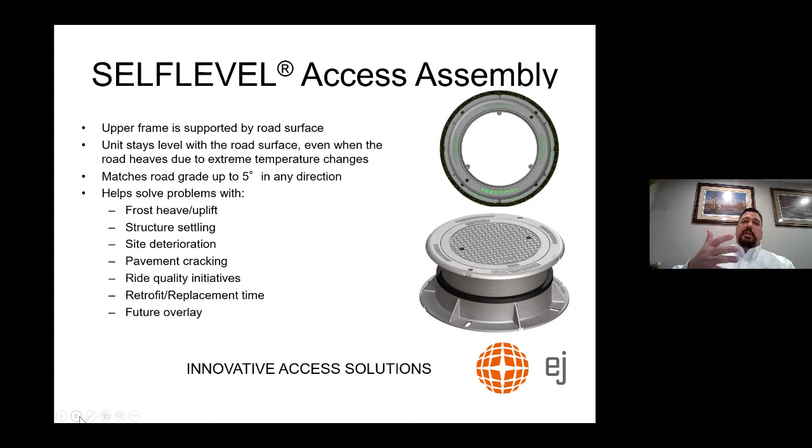Your pavement isn't going to last forever, and this isn't going to make it last forever. But if you can get another 6 to 8 years out of your asphalt life without having to come in and do any remediation or repair work, and your constituents have driven over this multiple times and never had an issue with ride quality, then by all means it's worth it.

I know there's some popular questions that come up when we first take a look at this. At the end, I'll be happy to answer those questions. So I'm going to move along with this video, and I hope that everyone can see it. Apologies, the narrator's not all that exciting, but I won't talk through this so everyone can get the information included.

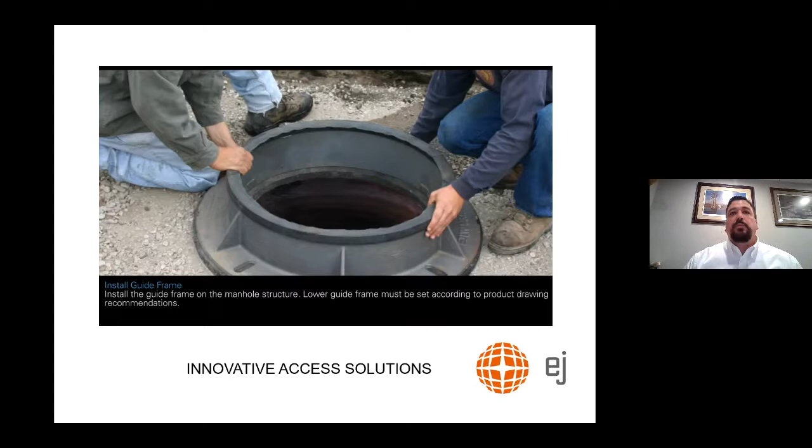Install the guide frame on the manhole structure. The lower guide frame must be set 10 to 14 inches below finished grade. Backfill the guide frame with standard road base material per your local specifications. Install the upper frame, compact backfill and/or base leveling lifts as specified. Pave over the upper frame.

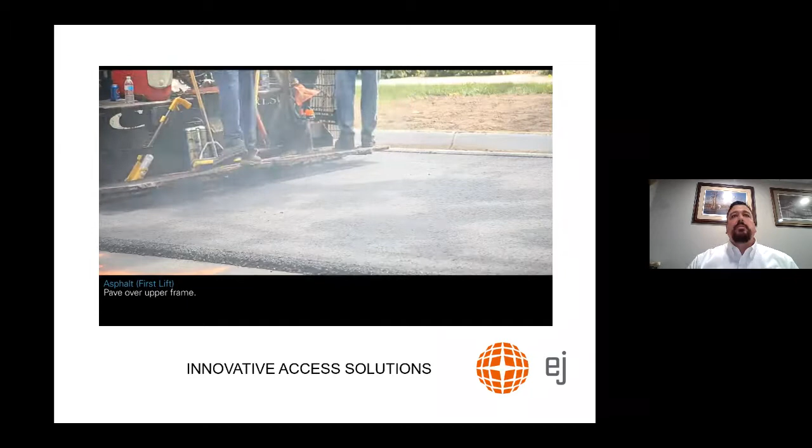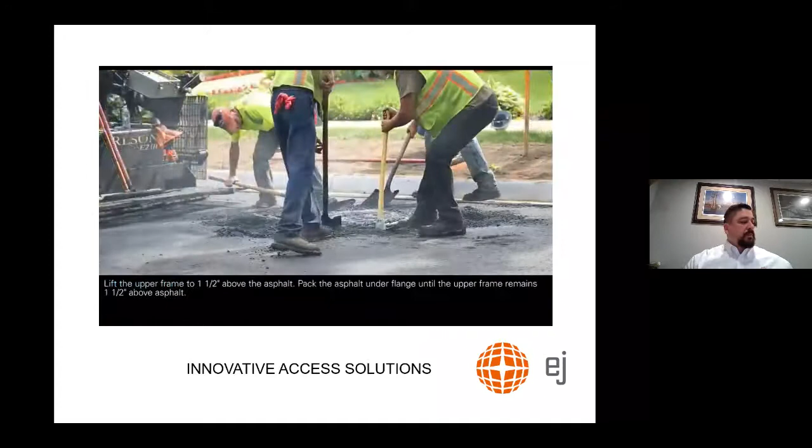Remove the asphalt from the upper frame. Lift the upper frame to 1.5 inches above the asphalt. Pack the asphalt under the flange until the upper frame remains 1.5 inches above the asphalt. Clean the cover as needed. When compacting, start with the outside perimeter, working the asphalt to the center.

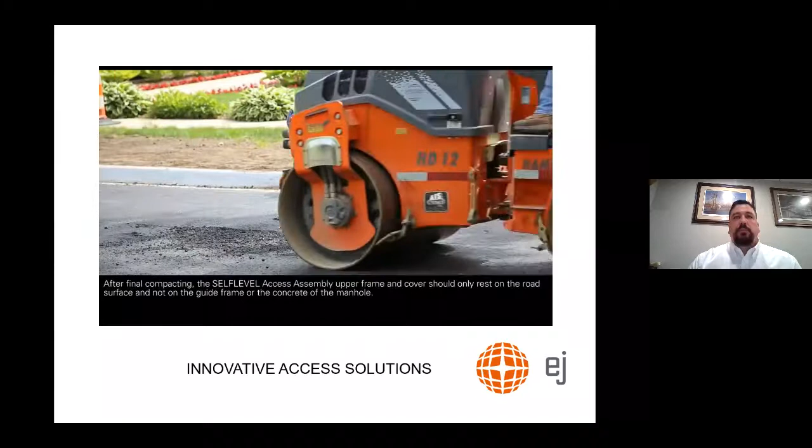So you've watched the video. There's multiple ways of what I call protecting a casting in a roadway. I'm not saying the other ways are good, better, or worse. I'm just providing an alternate method to get the desired finish. This gets completed with the paving process, and there's no delays in opening your roadway.

If you have an application with a pretty heavy profile between your base, leveling, and wearing courses, you can come back and remove the pavement, have the structure plated, remove the pavement again, set it in the same lifts you'd want with compaction, then roll it, or you can do it as part of this paving process.

There's no additional crack sealing required because there's no dissimilar materials. Adjustments later on are very simple and easy. If you're doing an overlay, it doesn't have to be manually broken out of the asphalt, but it can be reused for overlays and mills and fills. So there are no challenges with down-the-road improvements to the roadway.

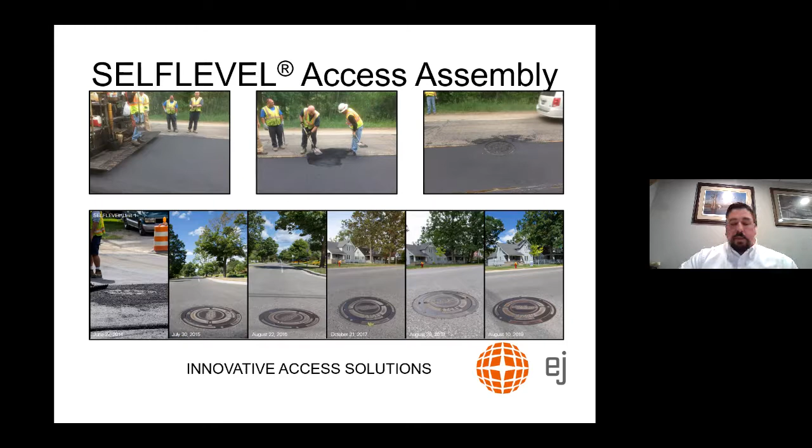So we took the idea of this asphalt self-level and we went ahead and applied it to the valve box. Now, I know that valve boxes are generally a local jurisdictional requirement, whether the municipality or whoever it might be, that they'll mandate what valve boxes get used, but they're still in DOT roadways, county, local roadways. I don't know what it is about valve boxes, but they're either buried or they've heaved up and broken off.

We took a great concept with this asphalt self-level for the full size and incorporated it into our valve box tops. As you can see, the very top of that is very robust and will handle traffic back and forth just like the other one. It doesn't sit up proud, it does sit flush, and that rolled edge is designed to accept that asphalt. So that is the same concept, a very similar installation.

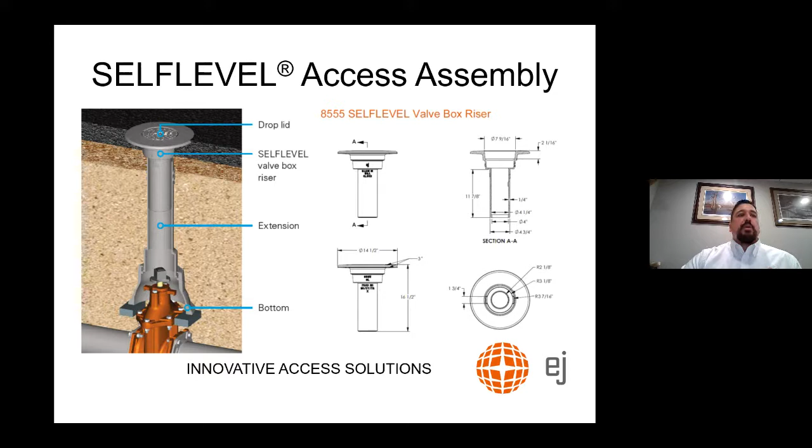Now, not all roadways are asphalt, so we have a concrete version as well. A couple of things to point out about the concrete version is that the guide frame is actually on the inside and not on the outside. Well, wait a minute, if it heaves and moves up, your class 2 or your 21AA or whatever you have for your engineered fill around there will migrate underneath and prevent it from setting back down.

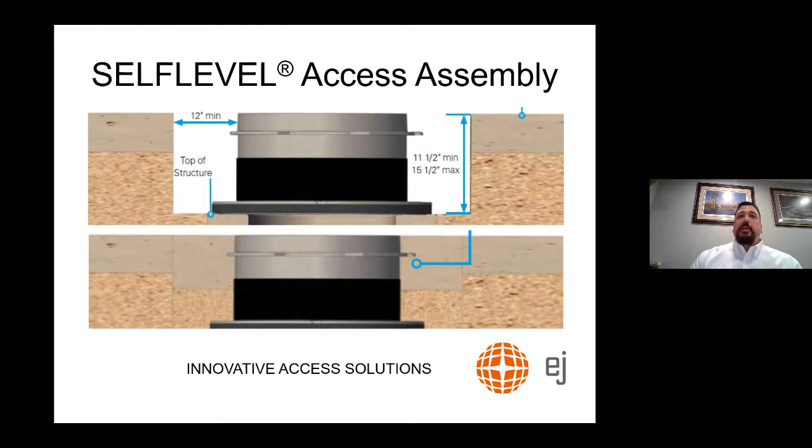So drive approaches, roadways will always be 6 inches or more. But if you're utilizing these in a sidewalk, where you get a lot of pedestrian traffic and concrete that's broken up, a lot of times it fails right at the casting because, same concept, it's not moving but everything around it may be. You have to at least make that concrete 6 inches. There is no ACI code that I can find, but I want 2 inches of concrete underneath those anchoring points, underneath those handles, at a minimum. So just something to consider for design.

And then I have a video here real quickly to show you, it's only a minute-long video. It's actually an installation done at one of our facilities, and there's a lot of LTL, a lot of truck traffic.

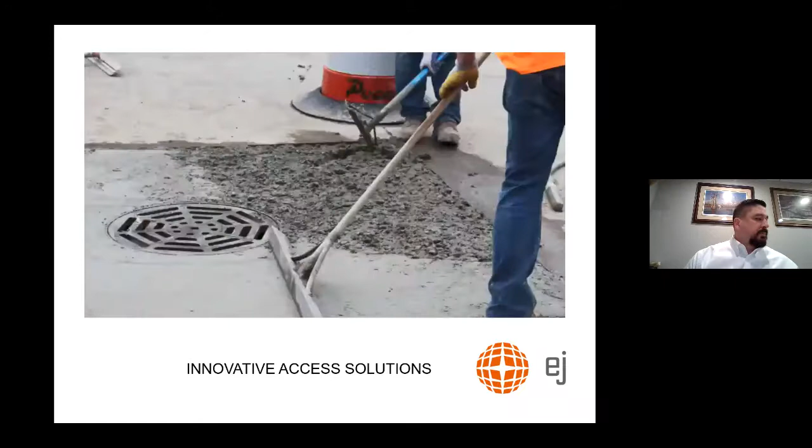Let me use my time up here to buzz this along.

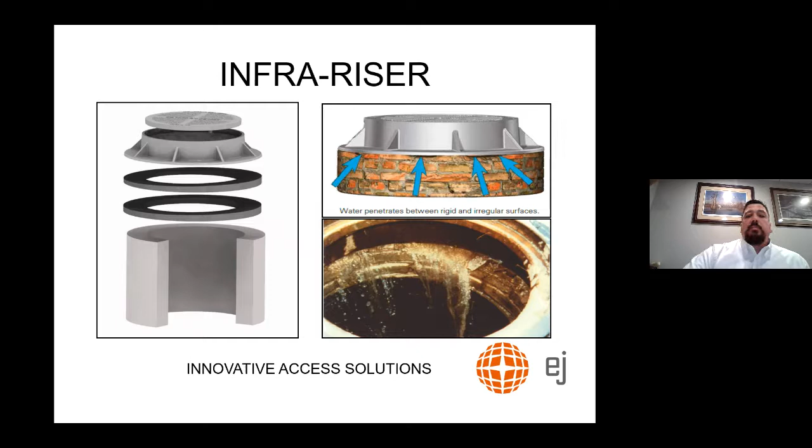So I am happy to answer any questions that you might have. I hope I generated a lot of questions, those are the best conversations that generated some of that interest.

A lot of information about these products and other products, including local specifications, are on ejco.com. So feel free to browse there. If you're still a click person and want to download any literature or brochures, we have them all available there, so I encourage you to stop in.

And again, open it up for questions now. I thank you for your attention, and my contact info is there. So I'm happy to answer any questions that you might have.

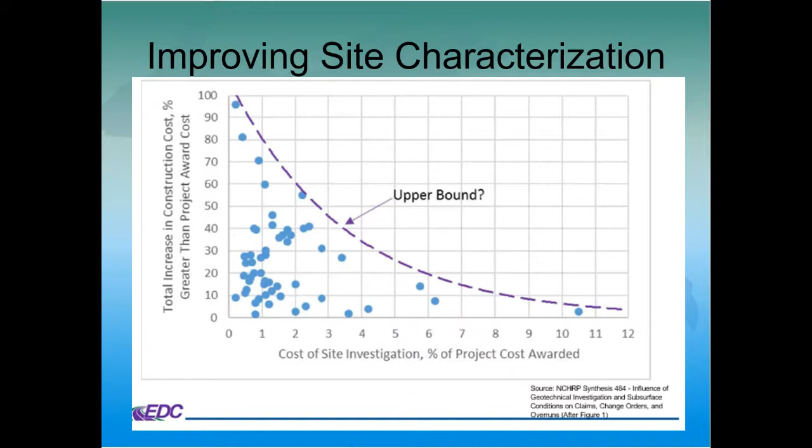This gets pushed into the ground at a constant rate of advancement of 2 centimeters per second per ASTM standards, and you take a reading of all these parameters every 2 centimeters, so every second. You're getting a tremendous amount of data, much more than our standard penetration tests, where we take 18-inch samples every 5 feet, so there's a lot of the soil we're not seeing.

A little bit about the history: CPT is not new, it debuted in 1932 in the Netherlands with a Dutch cone, a mechanical device pushed by hand. World War II brought the advent of electric cones, and today it's used extensively in Europe and Asia. It's picked up here in the US and North America probably since 2000, with early adopters being areas in seismic zones where shear wave velocity of the soils is really important, which we can measure with CPT. Pictures on the bottom left are some rigs from MnDOT, Minnesota DOT, a couple of trucks and an ATV.

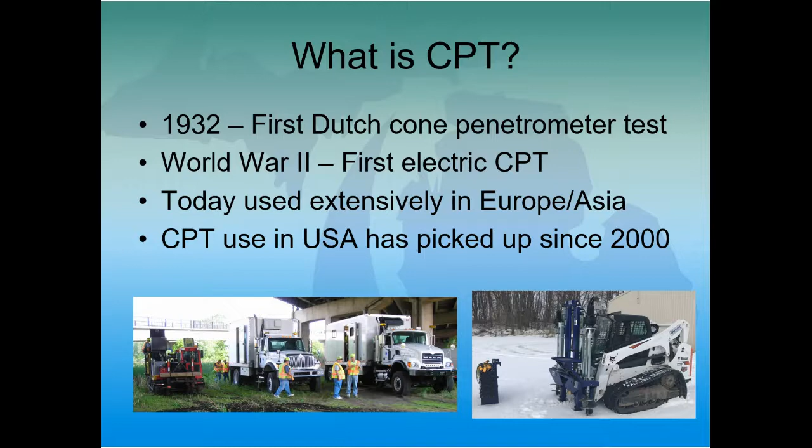Just a brief video to show the penetration. This is ours going in at 2 centimeters a second. The operator's watching the screen, making sure we're staying in there, that our inclination's good, also watching the results in real time. You can see the cable that runs down to the cone through the rods.

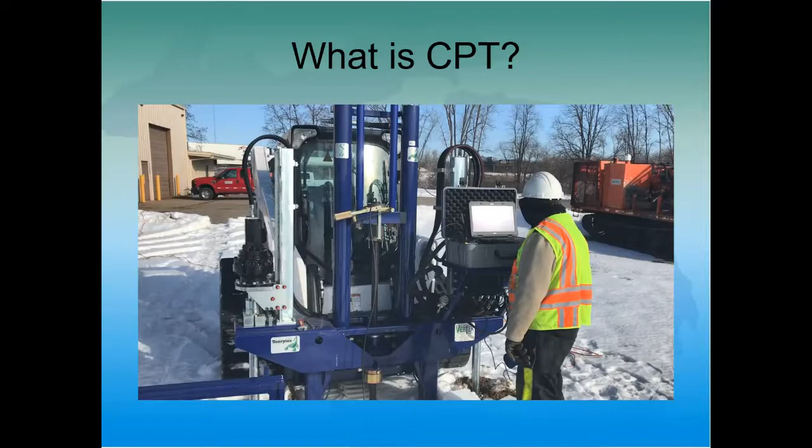This is just another short clip. Again you can see the penetration occurring, and in real time we're getting updates on the tip resistance, the sleeve resistance, the pore pressure. The graphic on the right is soil behavior type, which is something we'll talk about here, which is a little different.

So, soil behavior type is not a soil classification. We're not pulling samples out of the ground, we're not saying this material is silty fine sand or sandy clay. But what we do get out of the CPT is relationships that have been set up, and again these are correlations. How is the material behaving? Is it behaving like a silty sand, or is it behaving like a stiff clay? That's what we're going to get out of the CPT.

In general, to help look at the data and understand it, there are some general correlations and relationships. Granular soils are going to have high tip resistance and high sleeve friction, which gives you a low friction ratio, which is the sleeve resistance divided by the tip. Cohesive soils have a low tip resistance and high sleeve friction with a high friction ratio, and organic soils have very low tip resistance, very low sleeve friction, and a very high friction ratio.

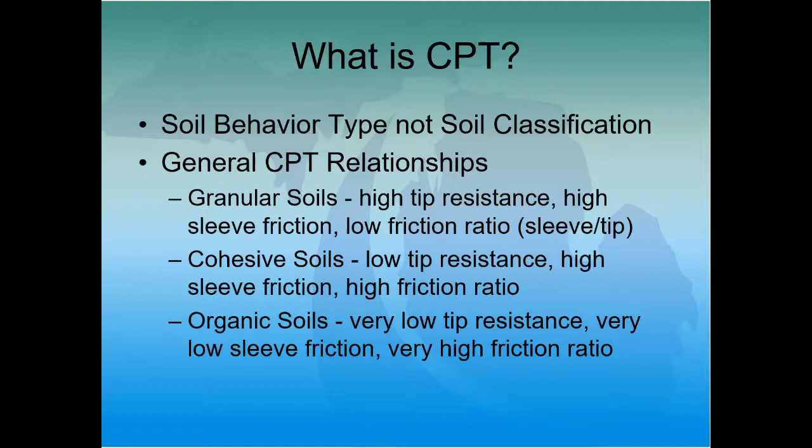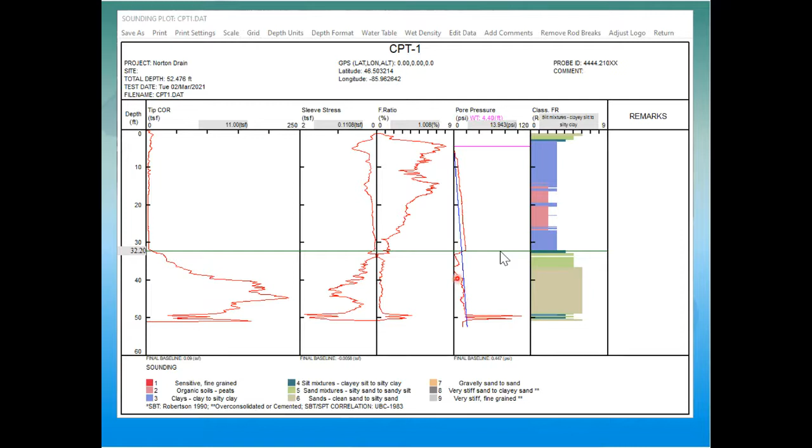And then I guess this is the other thing, our pore pressure sensor. This blue line is the hydrostatic pressure line, and you can see that when we're in these granular soils, that's matching up nicely too. That's another indication.

So what are some benefits of CPT? Increased production rates. It's faster than drilling. We've seen with our rig and jobs that we've used that it's 2 to 4 times faster than our traditional methods.

You get that nearly continuous soil profile versus the SPT sampling. Results are highly repeatable. We get some direct measurements of penetration resistance. There's a lot of correlated parameters to strength and stiffness and unit weight and some of those other things that are important. And then there's also some safety things here too.

The equipment's lighter. You're just using rods, not heavy augers. Smaller crew. We actually started doing CPT about a year ago when we were right in COVID, and that worked better for our crew sizes and isolation and stuff. And then increased safety. We don't have rotating parts like we do on a drill rig for entrapment and stuff like that. So it's a safer process.

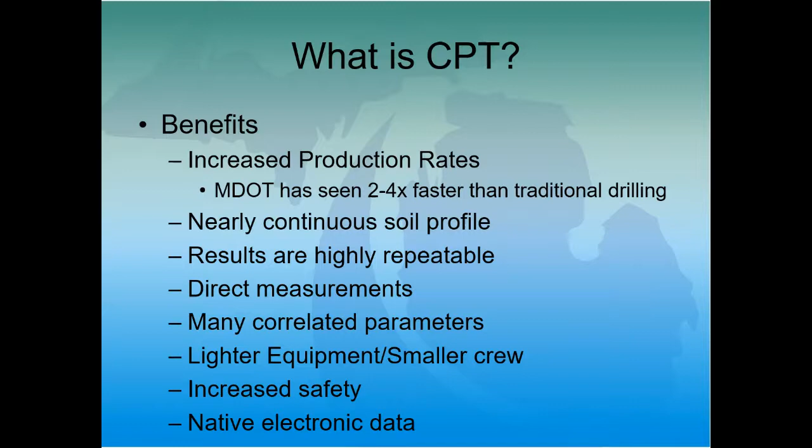Limitations: if you get into rocks, cobbles, boulders, we're not going to penetrate that with the cone. And for our setup, once you get to very stiff or hard clays and dense sands, you're kind of at the limit of the capabilities. You don't get any samples, so if you need samples for the lab, you have to get those a different way. And just the startup, the cost and kind of technical operations, it's much different than traditional drilling that they're used to, and so that can be a bit of a hurdle too.

So here's our equipment. We've got a Vertek system, so it's made in America, in Vermont. Again, the system, the blue frame. You can see the anchors, it's self-anchoring, so the anchors have to be seated in and secured to provide the reaction to push. Which is a problem if you have loose superficial soils.

But 20 tons of push force, it's self-anchoring, skid steer provides the hydraulics. We produced or purchased ours with the use of some STIC funds, which offset a lot of the cost of the unit itself, which was great.

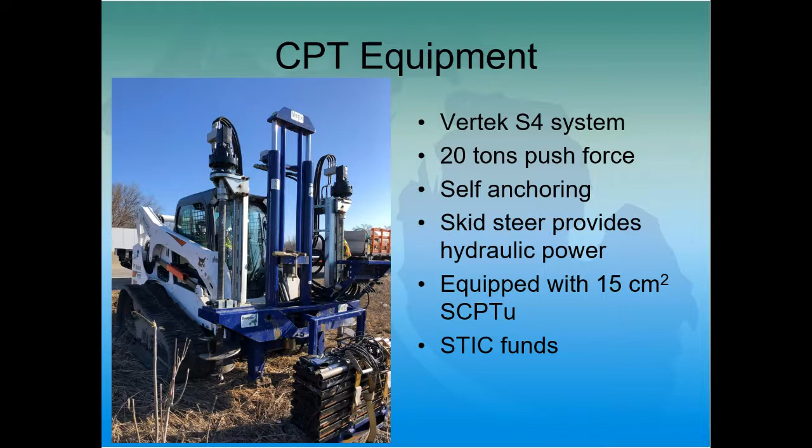We started using this, like I said, about a year ago, just as we were getting into COVID. Here are some locations that we've used this around the state. The red ones have completed. The yellow ones are some proposed ones. We've got about 12 locations around the state, and we've got 50 soundings, just looking at a variety of geologic conditions and geographic locations too.

Just a couple highlights here. M66 over Monroe Creek. This was a culvert replacement. This is in northwest Michigan. Like I said, we did this about a year ago, and we actually did the CPTs first because of COVID and crew sizes and stuff.

And what we saw, we identified a soft zone, so that when we went back with our SPT rig, we grabbed additional samples to really investigate that, found some organic soils, and actually ended up changing the culvert type and construction methods just to make the best project that we could, given those poor soil conditions.

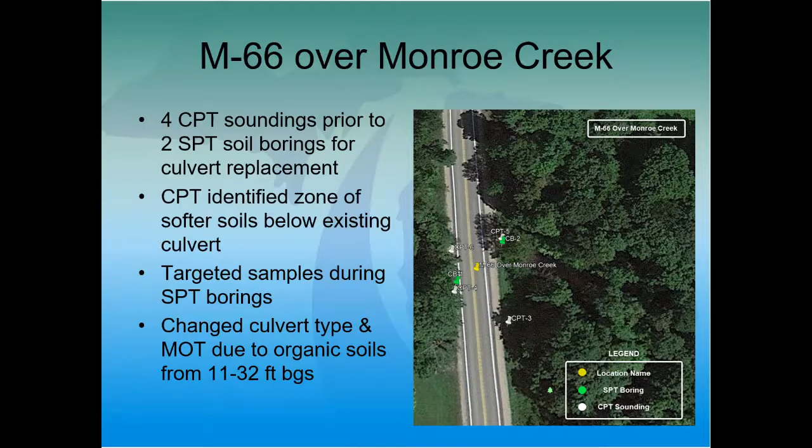Briefly here, this is Vista Avenue over Canoe Stream. This is on Belle Isle, so it's in the Detroit River. This is a single span bridge replacement.

We've got deep lacustrine clays, which are a little bit stiffer on top because they're desiccated, but then get soft, and 100 feet or so down to some denser materials.

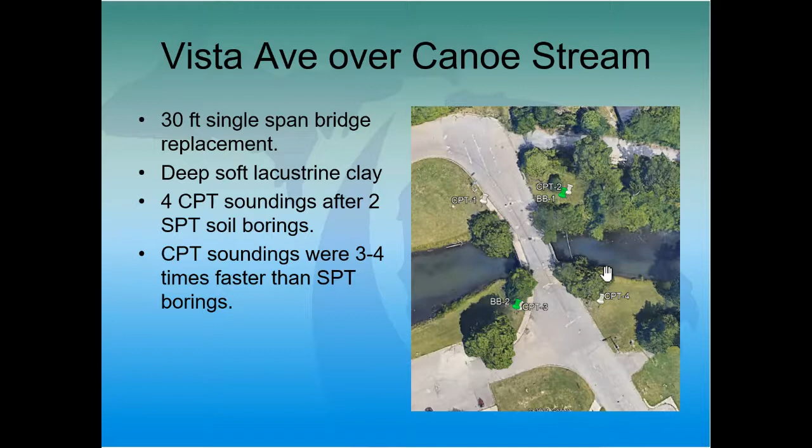So we did some 4 CPTs after a couple of traditional borings, and on this site we were 3 to 4 times faster. The CPT was 3 to 4 times faster than our SPT borings, which was great. So it gave us a lot more coverage.

Again here, our traditional boring, this is only a part of it because it was 130 feet deep. We were able to, but again, this top area is of interest because we have some stiffer soils that get softer with depth.

It's a little hard to see with blow counts, but we can certainly see with our CPT the reduction in sleeve stress and tip stress at about 20 feet. That's about the limit of it. And then you can see it's very soft until we're 95 feet down.

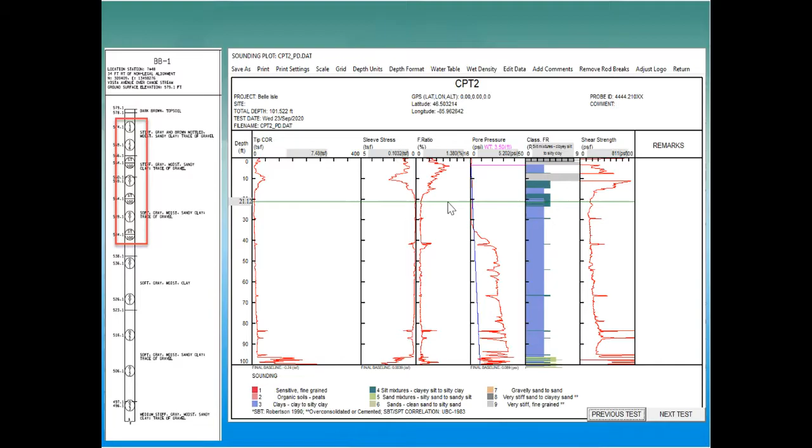So this additional data really gave us confidence in our site, and it's allowing us to move forward with a larger box culvert here instead of having to put a bridge back and drive piles to 100 feet. So saving thousands and thousands and thousands of dollars in time for this project.

So what are we doing now? We're continuing to look at our side-by-side tests with our CPT and regular SPT and some of our lab testing, just to get our head around that.

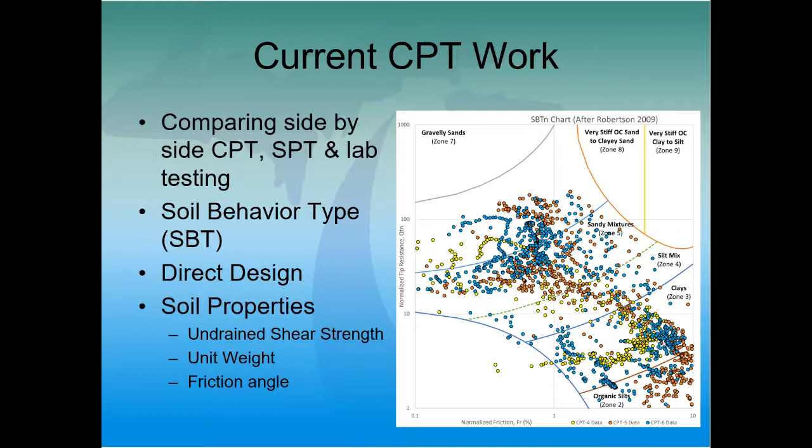Really trying to figure out this soil behavior type, where our soils plot on these charts, just to understand and identify them better. And then looking at some direct designs, taking the CPT data right into a spread footing design, for instance. Also looking at some soil properties to see how the correlations compare to our lab testing in our soils.

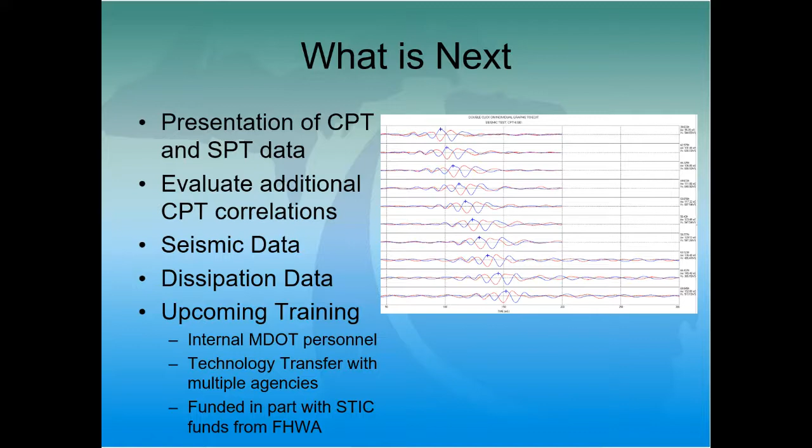And then we have some upcoming training, pending COVID restrictions, to do some internal training with MDOT, and then really rolling out into like a technology transfer with multiple agencies to just share our experience and where we think it can be used. That training is going to be funded again in part with some STIC funds, so we appreciate those.

Kind of our initial conclusions, as we're still learning a lot, and we don't have this all wrapped up, but at least what we've seen so far, the equipment and the software has improved a lot in the last years, and it's pretty straightforward and easy to use, even with remote training from the manufacturer. We do see an improved stratigraphy or soil layering, really understand that, and higher production rates.

For us, the anchor pullout limits our pushing resistance, but we kind of knew that. And then spread footing analysis, that looks good, but we won't be able to use CPT for piles more than likely, because in our geologies we're driving into and through hard things that we can't penetrate with a cone. I guess with that, a little over, but I'll open it up to any questions.

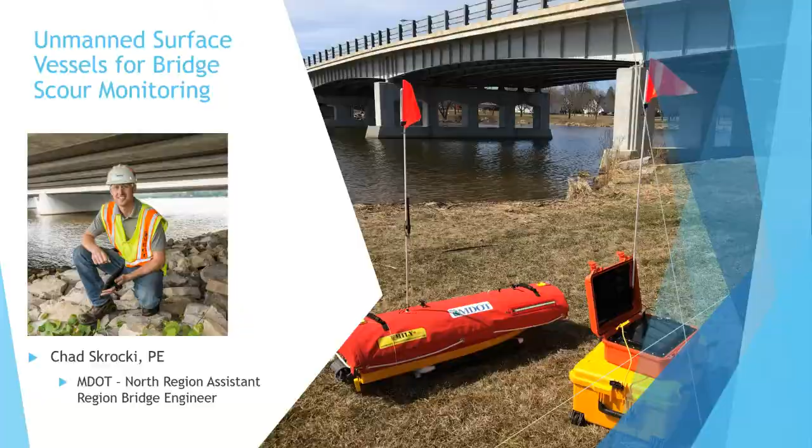I always like to start out with the why. Why do we need a boat like this? Scour is one of the leading causes for bridge failures, at least in the nation, and probably worldwide too. Here in Michigan, we have multiple scour critical bridges. A scour critical bridge is basically a bridge that has the potential to become unstable due to scour during a significant flood event. This can be either calculated or observed scour by an inspector.

For these bridges, we're required to go out and monitor the condition of them during a significant flood event, or what us people in the bridge world usually call a high flow event. In the past, we'd go out and monitor these, and all the stuff that would cause a bridge to become unstable is occurring below the water line. Usually the water on these rivers almost looks like chocolate milk, so you can't really tell, and they're flowing really fast, so it's really hard to determine what's going on below that water line. That's what kind of started the need. We also wanted to keep our inspectors in a safe position where they didn't have to reach over the side of the bridge or get down into the water. So that's why this research project was actually needed.

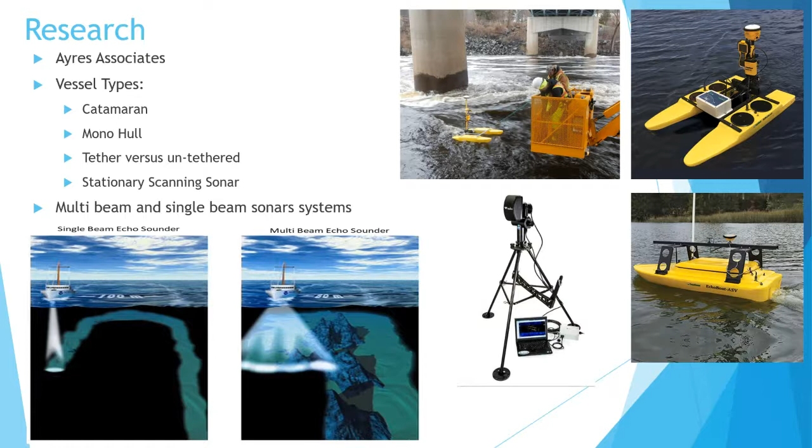And right at the end of the research project, we finally came across a USV that actually worked for our situation. It was called the Sonar EMILY. It's a safe system, it's got a jet drive on the bottom, so it's basically like a remote control jet ski. And it's robust.

It's kind of interesting because it was actually originally developed for lifeguards to use to rescue drowning victims or people stuck in a rip current. But then they tailored a new platform to include basically a high-end fish finder on it. The two merging together kind of made the Sonar EMILY. And then we customized it a little bit by putting a few extra things on it.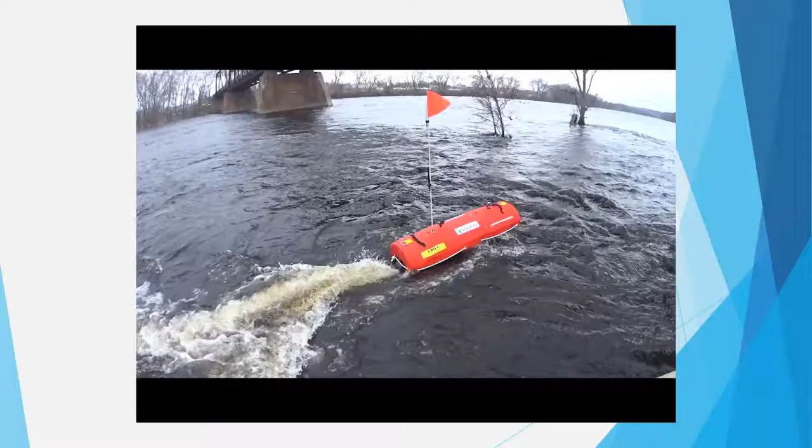Here's a video showing what it looks like in an actual flood type scenario. Like I said before, a lot of the vessels we looked at had a hard time keeping up in currents like this, where that's the prime location we want to utilize this type of equipment.

And this is just some of the sonar imagery that we've collected. So let me go back a slide to explain what everything is. Basically the boat itself has the transducer on it, and that's got obviously all the propulsion.

That's what goes in the water. But it also comes with this base station, which is basically a 12-inch Humminbird fish finder, but a little bit higher end than your normal fisherman would have. The transducer on the boat is attached to an antenna that relays it back to another antenna on the base station. So all the stuff the boat is collecting gets relayed and displayed on shore at the base station.

We also purchased 4 of these through the research project, to strategically locate them throughout the state, because you could have a flood or a big rainstorm event that could cover half the state. So having multiple units was really key for us.

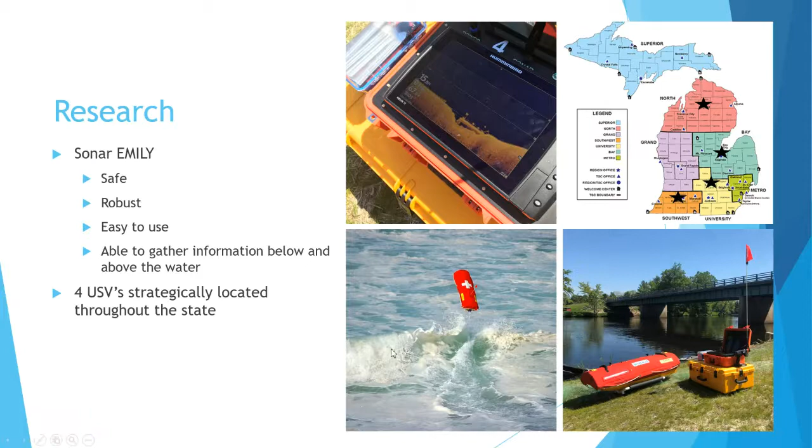This is just some of the imagery we were able to collect. Once the boat relays it back to the base station, it shows up, and it's basically just like your computer. You can take a screenshot of the imagery, and it saves it to an SD card. And the nice part is you can take that SD card and put it in your computer.

You can overlay it onto as-built drawings to see how the cross sections may have changed, or an underwater inspection that maybe had scour identified previously, and you can track how that scour may have changed, or maybe the footings got covered up again. So it's nice to use to track that.

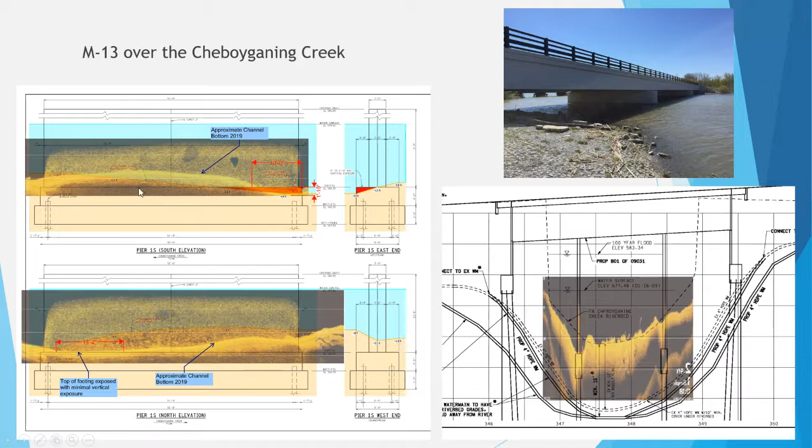This is all what they call down scan imagery. So the imagery that comes out basically makes an elevation view of the pier or whatever you're trying to scan. It's also equipped with side scan imagery, which basically makes a plan view of the stream bed.

This is one where the inspector identified some possible footing exposure, but we wanted to go out there and actually get the limits of it. So this is the actual raw data that came from the EMILY. As you can see, a lot of people always ask me, well, your abutment should be straight, right? So this is the south abutment, this is the north abutment. But one thing to remember with this imagery, it's all relative to where the boat is positioned.

The more you turn or maneuver left and right, the more your images will get skewed. So keeping a straight line makes the imagery a lot easier to decipher, and then you can get a lot better quality imagery.

The things we look for: the bold line furthest to the right, that'd be your abutment wall. Anytime you find another line paralleling it, that would be an indication that maybe a footing's exposed, and you can investigate a little further. As you can see here, it had those two pairs of lines that identified the exposure.

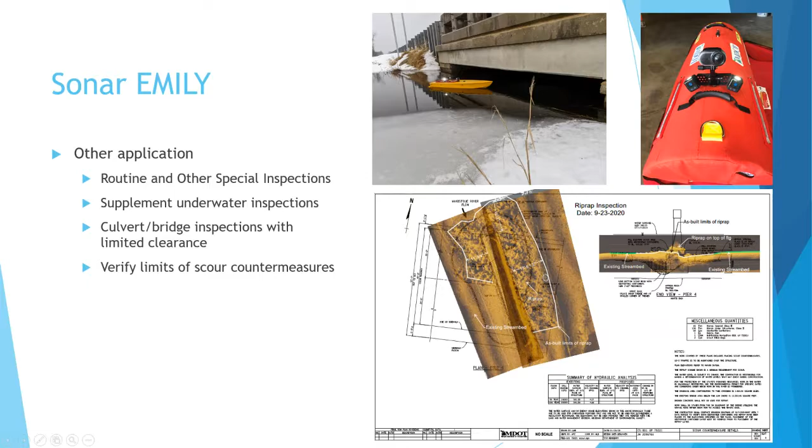This is nice because when you run it through a culvert, you don't have to worry about which way the boat is actually positioned. As long as you get it from one end to the other, you can turn the camera on the app afterwards and zoom in and edit the video to look at whatever you want.

As with anything, there's always limitations. As far as driving this boat, it's almost like a mixture of a remote control car and driving a jet ski. So smash those two together, and that's kind of what you're dealing with to try to maneuver these things. Anytime you have large debris in the channel too, obviously you can't really run the EMILY through that—it'll get tangled up in there. That's kind of what this picture is.

I don't know if you can see in the background, but there's a big log jam, and we actually got the boat hung up in the logs. Luckily, we were able to get it out, but that's one limitation. And like I said, it can be a little tricky to get used to operating the boat. Another limitation is you always have to have line of sight to the actual EMILY itself.

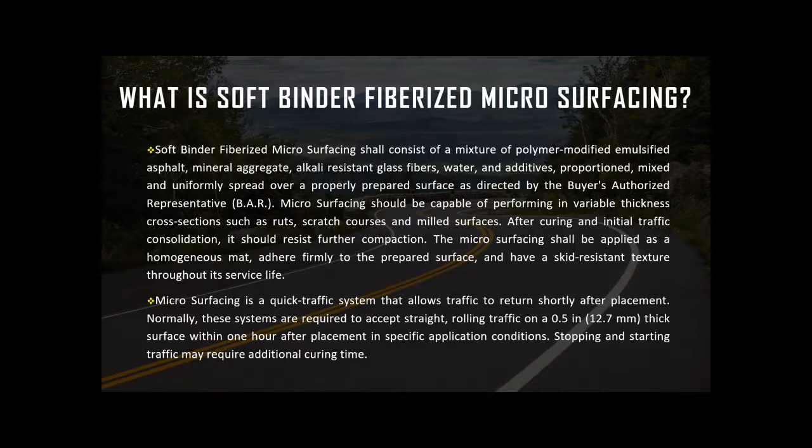Now, the system can do a lot of different things, but when we're talking about soft binder, fiberized micro, we're not talking about something we would use in a residential type area. It's mainly going to be for county roads and highways and things like that, basic straight running traffic in a normal sense.

We're going to talk about a couple of things: a project that was done back in late September of 2019. I put together a job mix formula here off of a design for, and this is a typical limestone aggregate with the 64-22, and even with the fibers or without the fibers, the mix design is requiring somewhere around.

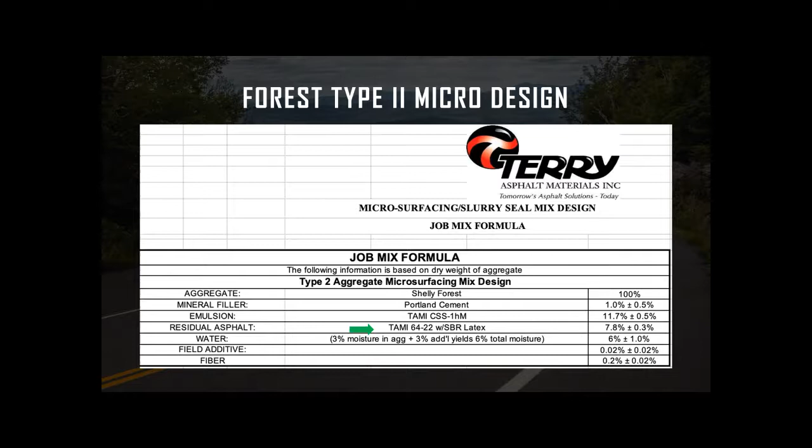11.5 to 12% asphalt emulsion. What we found when we were doing the testing for the soft binder is that mix design wise, there really was no difference. We still had to add the same amount of liquid asphalt emulsion, we still had the same parameters that we followed. The only difference was some of the lateral displacement tests that we do in-house showed up to where they were a little different, and we had to work on that within specifications.

I'm going to show a short video of the process actually going down so you can see exactly what is going on. There is no sound, but I will explain a few things as the video is going on.

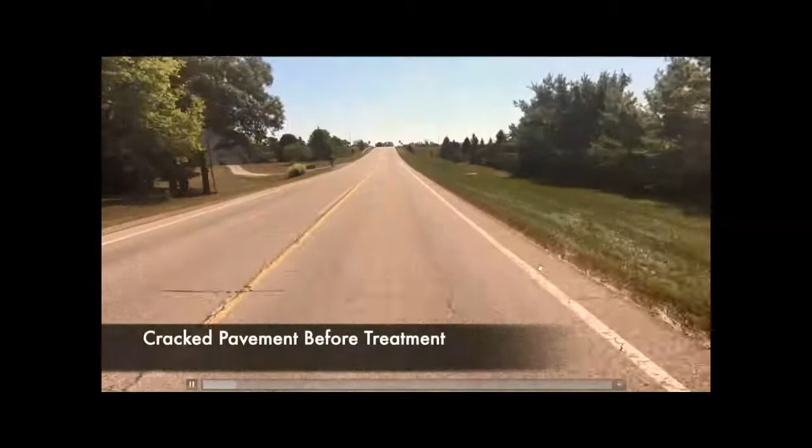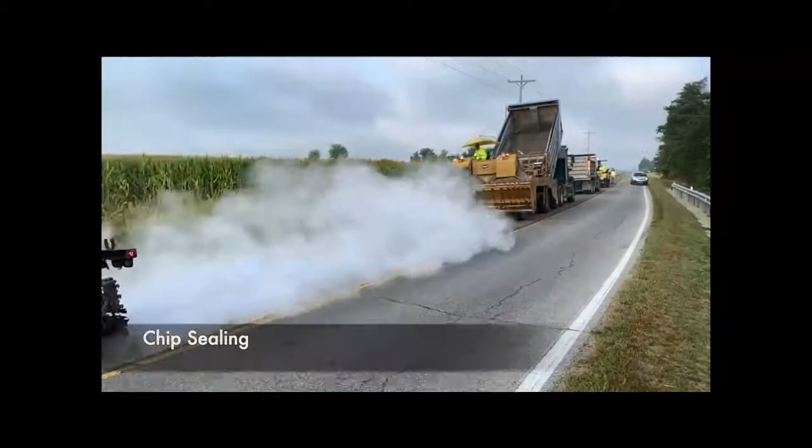This was a county road that we did. We actually left about 900 feet on the east end and about 900 feet on the west end of the project without a chip seal. The county came in and wanted to chip seal the roadway, so they chip sealed those areas except for those. We had 3 control sections that we had in there, and one that was an in-town section that had previously been overlaid.

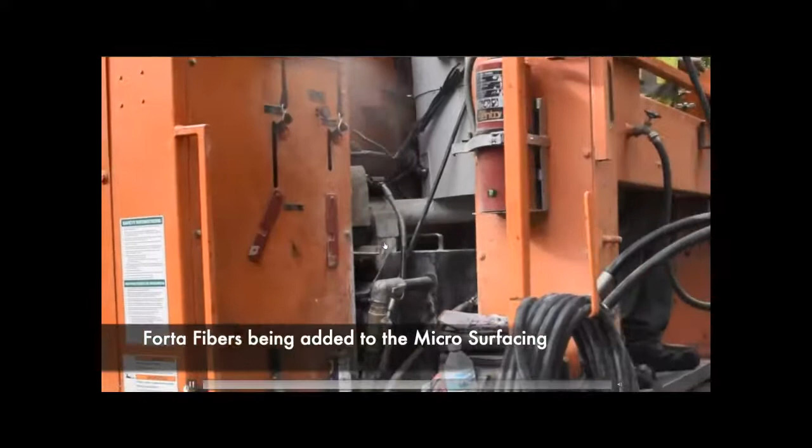So here's a typical M1 microsurfacing paver laying the soft binder fiber micro. You'll see how the fibers are injected, you can see right here, the fiber feeder, putting the fibers into, the fibers are actually dropped onto the aggregate, you can see there, and then mixed in the pug mill with everything else, the aggregate, the water, the emulsified asphalt, and any additives that are added, and then applied to the roadway surface.

This was actually a double lift microsurfacing of a total of 30 pounds per square yard. Like I said, we went in and we monitored those sections. We did some crack mapping before, during, and after the placement, and I'll show those results that we have currently here in just a minute.

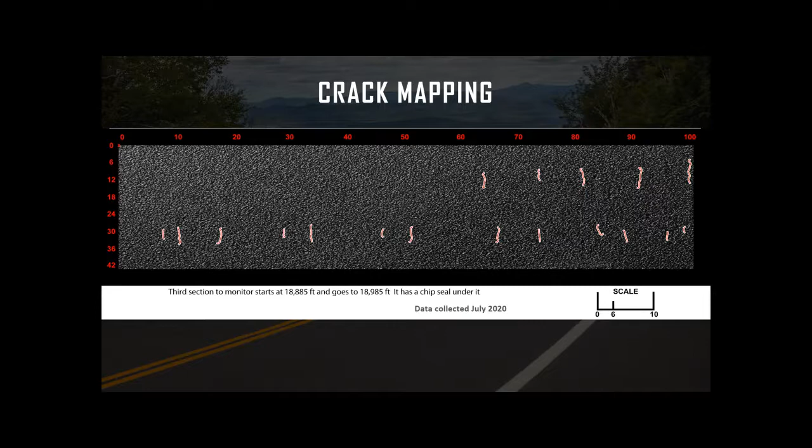And then the last section, which was on the other end of the roadway, was really cracked up pretty bad. The pavement was, according to the county, really structurally sound, it was just old and dry, and they just wanted to save it for a number of years. After seeing the results, they're convinced that it'll probably last longer than they anticipated. Here's that in July. Now we'll do crack mapping again in April, and then we'll do it again in July or August and see what those results come out as well.

But we're really trying to address a couple of issues, and one was Michigan DOT's concerns about microsurfacing. Microsurfacing's been around the country for probably at least since the early 1980s, when I was part of a group that brought it to the US from Germany. And so it's had a lot of success and it does a lot of things. But the concerns that Michigan brought really made us stop and think, okay, how are we going to correct these issues up in the UP and in other areas?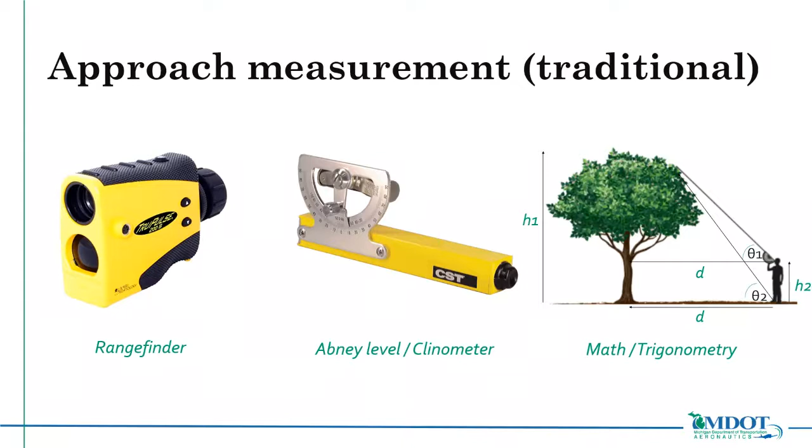So it's not all-encompassing information, basically multiple rows of trees—we can't really report exact locations. But with the rangefinder, it does a decent job, though still not the greatest. Also, you couple in human factors such as navigating around difficult terrain on the airfield, inaccuracy of the basic equipment, or if you mess up the numbers, if the math is wrong, then your slope clearance or obstruction clearance on the slope can be off. Weather—you couple all that stuff in, and it's basically a primitive way to measure, but like I said, you can tell if something is in or out.

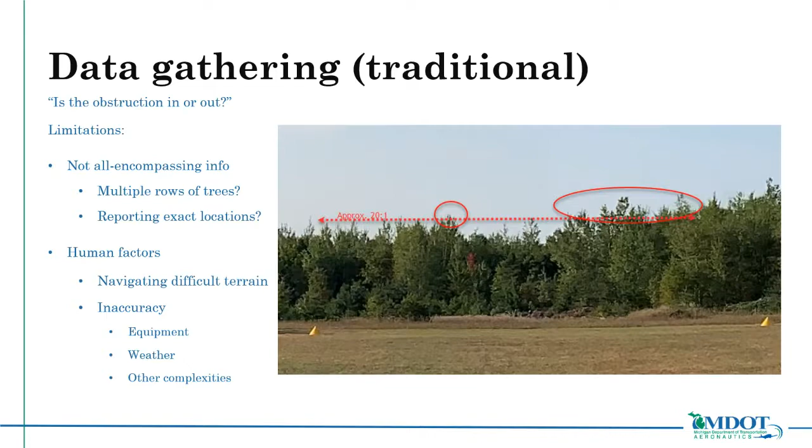Awesome, thank you, Michael. I started up here. Okay.

Hi everyone, I'm Zach Texan with the Office of Aeronautics, and I'll be going over how we utilize UAS, also known as unmanned aerial systems, but more commonly referred to as drones, within our office to enhance our airport inspections that Michael just talked about through what we call runway obstruction surveys. We do this by taking photos of the approach areas at all the public use airports with drones, and then reconstruct a three-dimensional model of that survey area for analysis.

The actual survey on site can be broken down into three main components, the first being ground control points. For those unfamiliar with photogrammetry, these are basically recorded latitude, longitude, and elevation points within the survey area that will be used to correct the position of our final model. We use a high accuracy GPS recording instrument for this purpose.

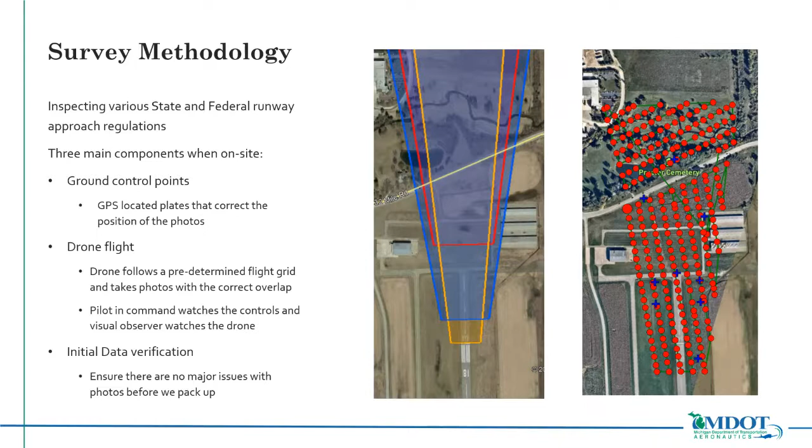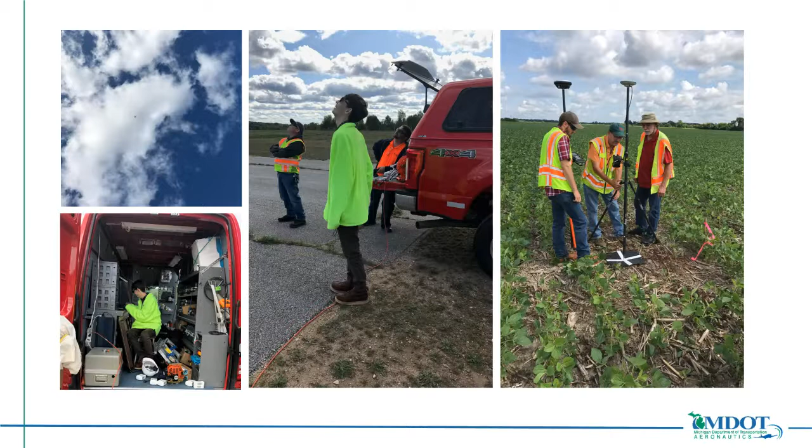Once the on-site portion of the survey is complete, we can bring all that data back into the office and create a three-dimensional model from all those collected photos using software called Pix4D Mapper. Because of all the ground control points we collected on site, the majority of our models have been seeing accuracies within 3 inches.

It does depend on the topography of the survey area. Some are less accurate than that and some are more accurate, but 3 inches is a good average for what we've collected thus far. Once the model is created, then we can import a 3D model of the approach regulations and visualize the penetrations and do further analysis.

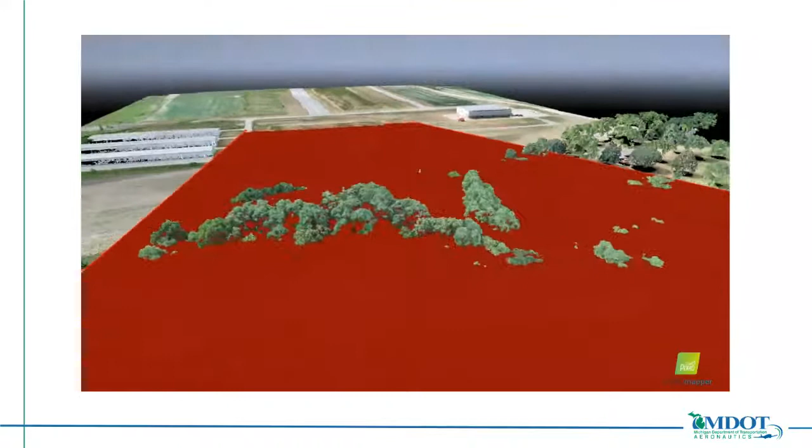From this point cloud, we're able to provide airport managers and sponsors with detailed latitude, longitude, and elevation data. We want to give them a comprehensive view of their approaches and make sure that if they go out and clear trees, they clear all the correct trees, or if there are other obstructions, that they know about those.

So that was really just a quick overview of our runway obstruction surveys utilizing drones. I want to wrap up my portion with some results of some of our work. This is an example of a successful tree clearing project at Romeo State Airport.

Throughout 2020, we contacted a tree clearing company, provided them with the location data we found for the penetrating trees, and they were able to go out and clear those trees.

We went back out in the fall of 2020 after the tree clearing project and were able to verify that all of those trees were clear, and the airport is now in compliance and, as a result, much safer. That concludes my portion.

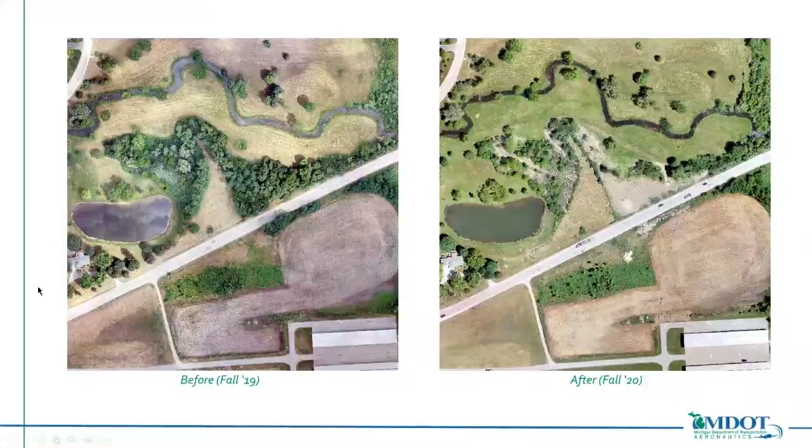So as Zach said, I'm Ken Bowers, an FAA Part 107 remote pilot for MDOT's Office of Aeronautics. I'm going to go over briefly some of our other support using UAS within MDOT and other agencies. As we got our UAS program off the ground, and before we really got into our runway survey flights, we started assisting a few other agencies within MDOT with various projects.

One of the first projects I was a part of was using a UAS or drone along US 131 north of Grand Rapids to capture images of construction. Let me start this video here so you can see those photos. We did that with MDOT's photography team.

We've also conducted numerous ITS, or Intelligent Transportation System, field reviews using UAS. The first one was conducted along US 131 from about 6 mile to 10 mile road, where we shot 4 locations for either CCTV or weather data collection poles. The flight was so beneficial that the engineers actually called us back out to do 4 additional sites later on.

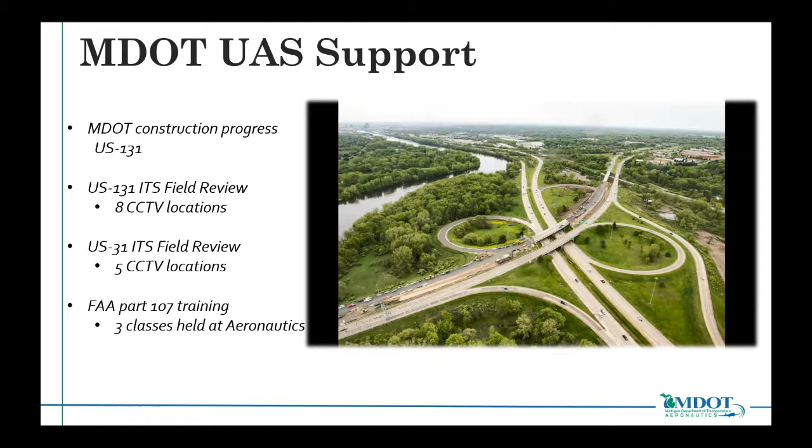Last summer we spent a day going around the Grand Region, from South Haven up US 31, over to Big Rapids at US 131, and back down to Ionia and Portland. I think we did 9 additional locations that day along various M routes.

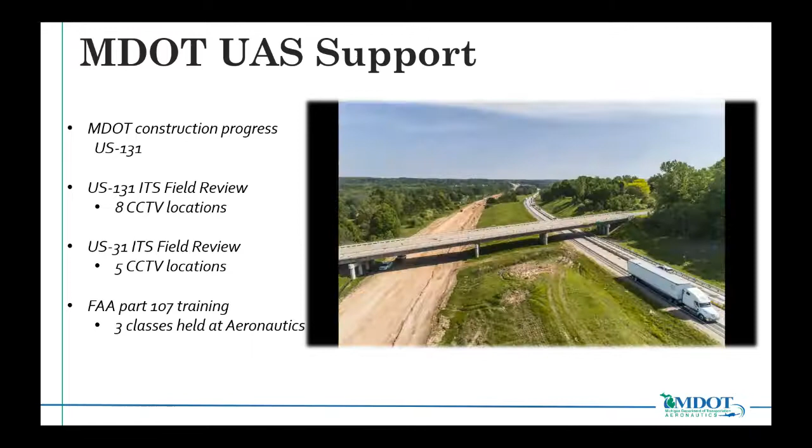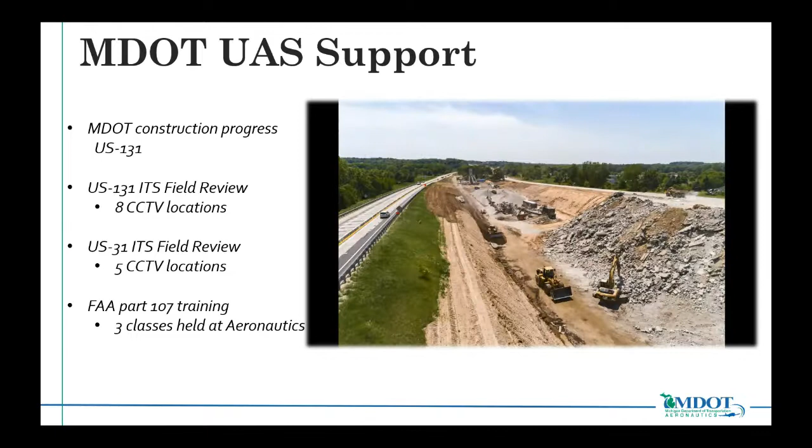In addition to that, we also want to assist anyone looking to obtain a license so they can potentially fly for their own department. We've held 3 classes at our Office of Aeronautics facility where we cover all the pertinent material for FAA Part 107 remote pilot testing, with hands-on practical application using various types of UAS devices. I believe that's something we'll continue as long as there's interest from other areas, and of course once the COVID restrictions open up a bit.

I wanted to show briefly what we're looking at when we fly ITS CCTV locations. These pictures show part of the latest ITS flight along US 31 in Grand Haven I did a few weeks ago. Both sets of pictures are different locations, but also at different height requirements depending on visibility, either 35 to 40 feet or 80 feet. The top pictures are the lower altitude and the bottom pictures are the 80-foot altitude.

Sometimes it does not change the visibility of the route and the traffic, and in that case engineers can utilize a shorter pole to save costs. However, these are great examples of instances where the height of the camera would drastically change visibility because of trees in the median or a curvature in the road. You don't really get that depth until you're actually up at that height. There have been many instances where the engineer had planned for a location, but once we got up in that spot, it was too restrictive and better off 5, 10, 15, 20 feet in various directions.

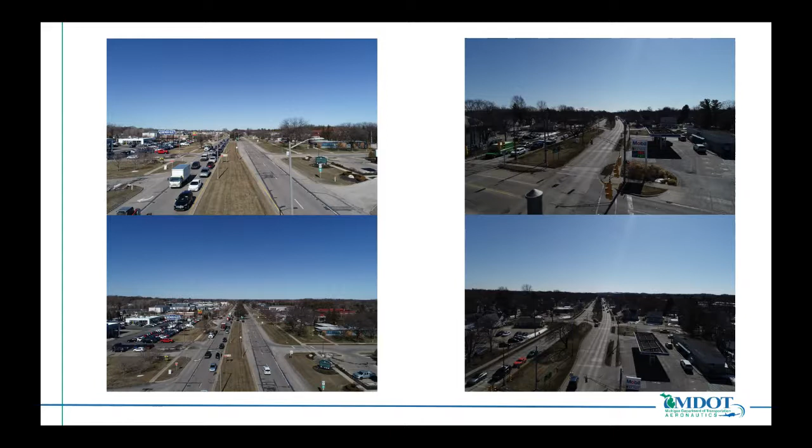We utilize the median as much as possible, and with a boom truck, traffic probably would have been blocked in one lane. With the wind we had that day, although the drone could take it, a handheld pole would have been a liability in that small median with traffic on either side. So the feedback we get from these flights has been nothing but positive from the engineers and contractors we've flown for. That's really all I had. It's a brief overview of the support we've provided and can provide going forward. If there are any questions for any of the information we've covered, we'd be happy to try and answer them. Thank you.

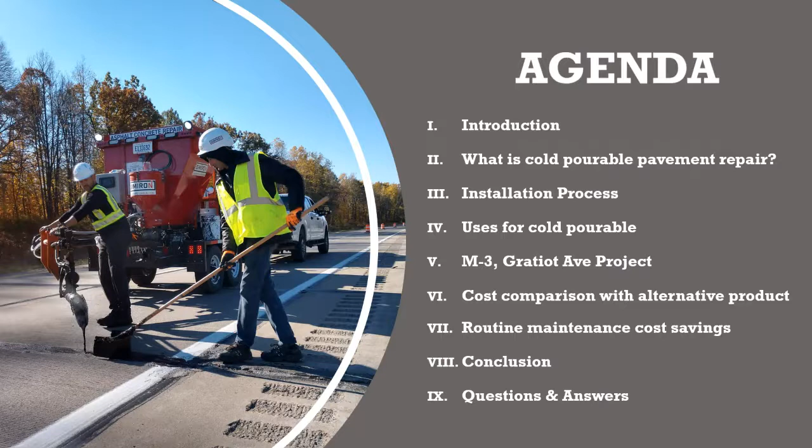I will start with the introduction to provide brief information about pavement history and the attributing factors for selecting cold pour repair. Joe will then take over and explain the product, installation, the Gratiot Avenue project, and show you lots of photos. I will be back to talk about the cost comparison with alternative products and the savings we had from using cold pourable pavement repair. I will then go over a brief conclusion, we will wrap up our presentation, and answer any questions you may have.

Pavement history for state trunk line M3, known as Gratiot Avenue. The section of Gratiot Avenue where we performed cold pourable pavement repair was constructed in the mid-50s. A Capital Preventive Maintenance, or CPM, project was done in 1992. No major construction has been done in this section of Gratiot for about 29 years, except sealing cracks and joints, and of course lots of pothole patching.

Attributing factors for selecting cold pourable pavement repair. Due to the very poor pavement condition, there were challenges concerning manpower and equipment for the maintenance crews to keep up with pothole patching.

Therefore, a short-term heavy maintenance project was necessary to hold the pavement together until we do a reconstruction project. Typical heavy maintenance projects we had done in the past as a short-term fix included hot mix asphalt, detail 7, and hot mastic. I will go over these repair methods later in the presentation.

We were familiar with cold pour pavement repair because we had done a couple pilot projects in Macomb County: a small pilot on M59 in 2018, and a larger scale pilot on M53 in 2019. Pilot repairs were holding up.

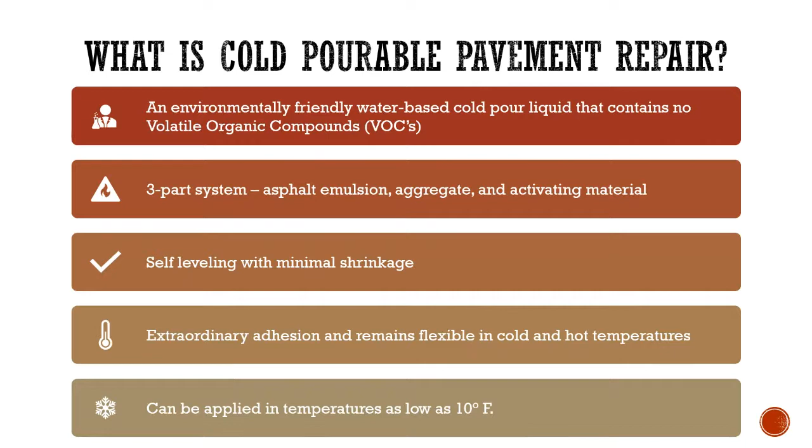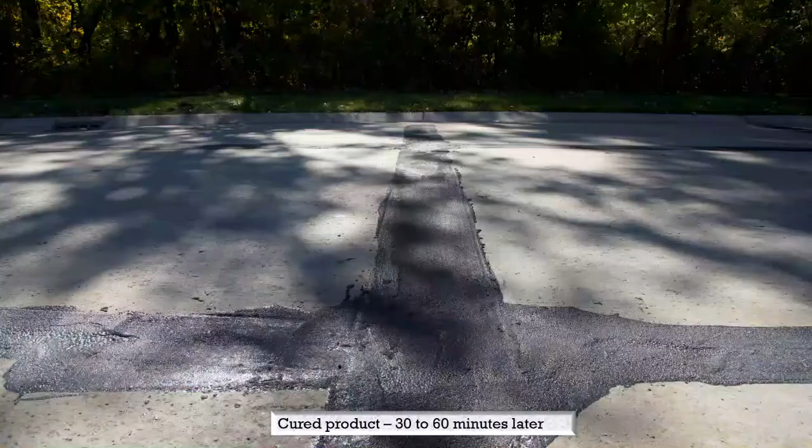This is how our product looks once it is fully cured, roughly 30 to 60 minutes after it has been placed. At this point, we are open to traffic.

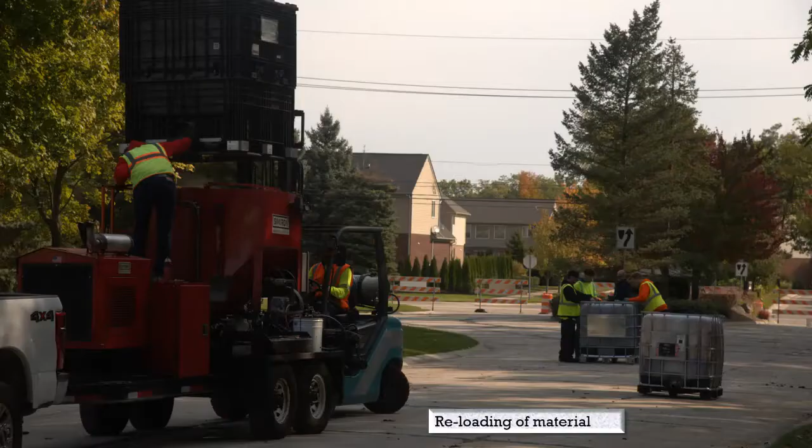Reloading of material occurs in less than 30 minutes and we are back to work. 250-gallon totes of liquid are swapped out and the aggregate hopper is refilled, as you can see the Cimarron crew doing here.

So what are some ideal uses or areas for this material? Our cold pour material performs well on both concrete and asphalt roads and is a cost-effective repair for many types of pavement distresses, including...

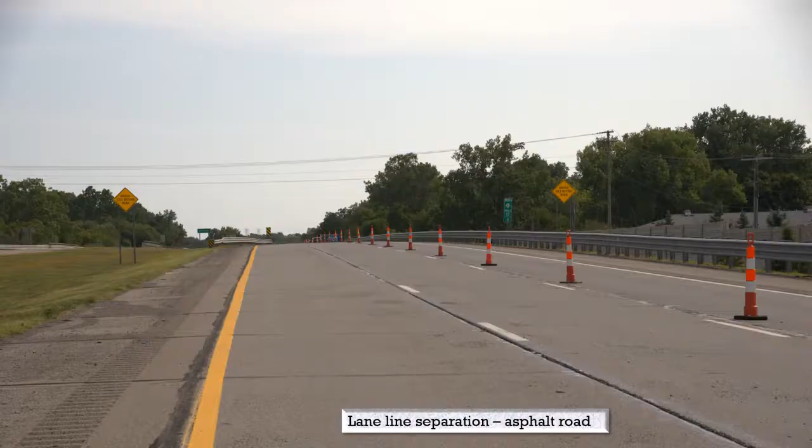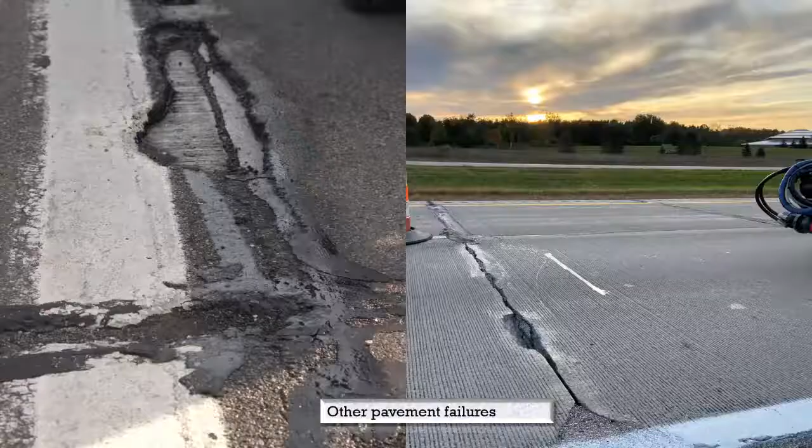Concrete roads with transverse and longitudinal joint failures, asphalt roads with lane line separation issues, again asphalt roads with centerline deterioration, and other various types of pavement failures.

In the summer of 2020, Cimarron was awarded the contract to perform both transverse and longitudinal joint repairs on M3 Gratiot, from Common Road to 14 Mile Road, with our cold pourable pavement repair. The scope of the project was to high pressure blow out, prime, and place our material on all transverse, longitudinal, and adjacent pothole areas over a 7-lane mile working area.

To minimize disruption to the motoring public, work was conducted at night from 7 p.m. to 5 a.m. The following 2 slides will represent some of the existing roadway conditions prior to the start of the project. As you can tell, the road was in very poor condition.

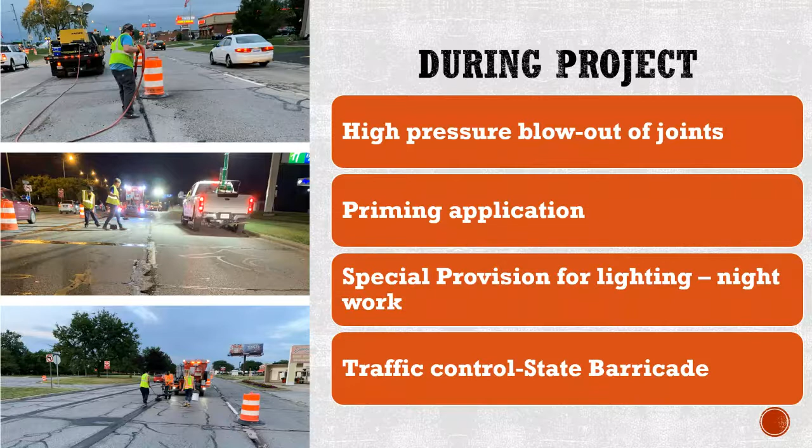The following 2 slides are pictures of the Cimarron crew working during the project and illustrate some of the conditions present on the roadway. 2 lanes remained open to traffic during the entire project with intermittent turnaround closures only in work zones, with the entire road open fully to traffic by 5 a.m. each day.

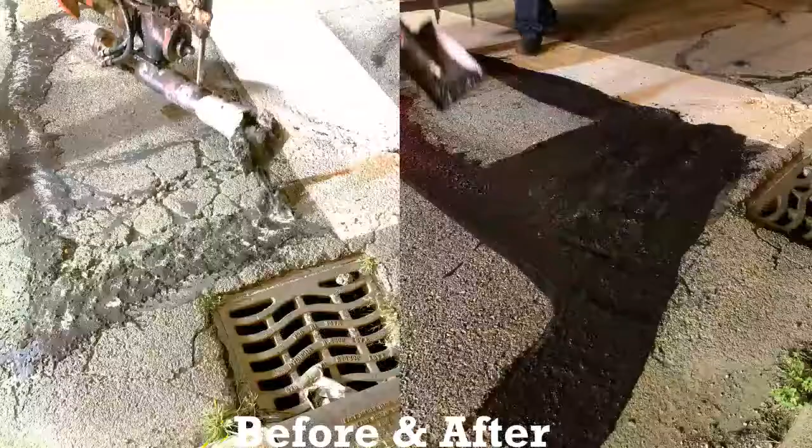The next four slides will represent some before and after pictures of several areas during the project. As you can see from the pictures, the task of the cold pour material was to seal up the failing areas and minimize continued failure.

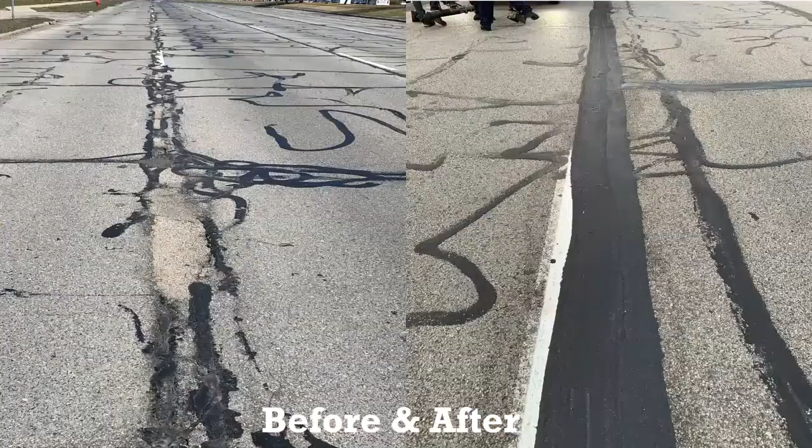One question that is always asked is, how does this material hold up or perform? The following three slides are pictures that were taken in February 2021, a short period after the work, but they illustrate how the material looks as we come near the end of the 2021 winter season. So far, in my opinion, the material is performing well.

We at Cimarron believe the cold pour material offers many advantages over other methods currently being used. These advantages include next to no downtime or waiting around for materials to heat up, improving production. Our product, as mentioned prior, contains no VOCs, which is an environmentally friendly alternative.

Product placement can be deeper than 2 inches in a single lift. We have material variability on demand based on smaller or larger areas, meaning we can pour our material more liquidy or stiffer based on road conditions. Our machine has a wide range of motion, so we can make various repairs concurrently, leading to much more production.

Finally, we offer very competitive pricing and believe we can be another tool for road agencies to stretch their maintenance preservation dollars. One item of note, Cimarron is currently working with Rob Green and Andy Bennett from the MDOT Preventative Maintenance Department, as the cold pour material is an emerging technology.

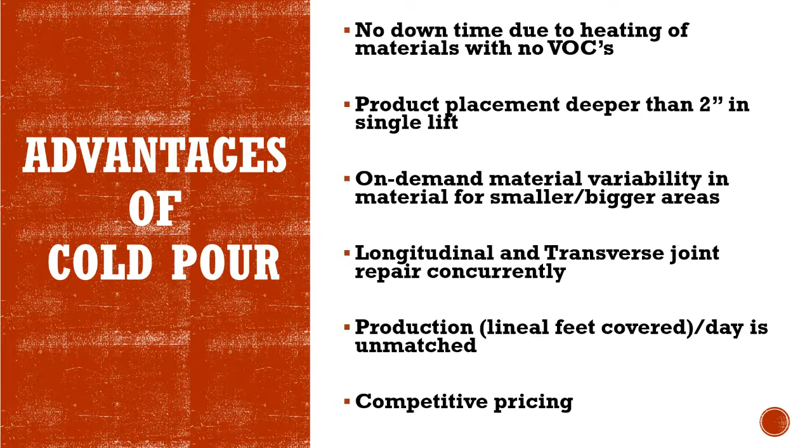Now I will hand the presentation back over to Ahmad for the final few slides.

Thank you, Joe. We thought the best way to determine the cost effectiveness and production rate of the cold pour pavement repair was to compare it with the repair method that we had considered to use for Gratiot Avenue.

Hot mix asphalt, detail 7, is a more labor-intensive repair. It involves removing all loose deteriorated asphalt or concrete by milling or jackhammering, cleaning joints or potholes, applying an application of tack coat, and placing compacted hot mix asphalt in prepared clean surfaces, with temperature of the asphalt mixture ranging from 250 to 350 degrees Fahrenheit.

Mastic is a hot applied pourable aggregate filled with polymer modified asphalt. The joints or potholes are cleaned and then filled with hot mastic, with temperature ranging from 375 to 410 degrees Fahrenheit. Joe did a good job explaining cold pour, so I don't have much to add.

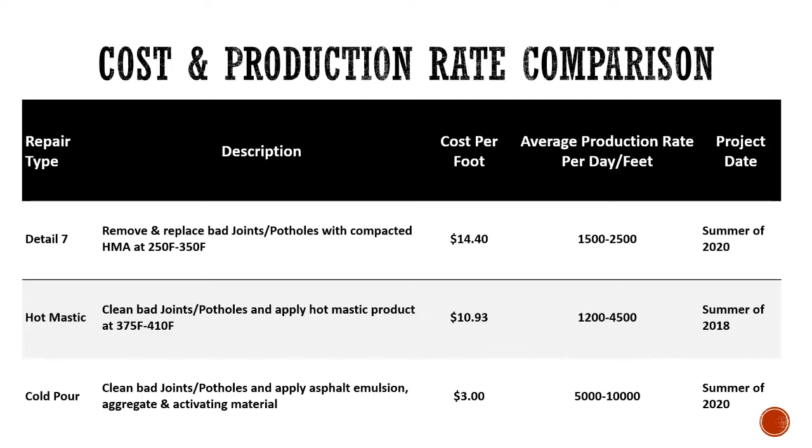As the table illustrates, cold pour pavement repair was much more competitive in cost and had a much higher production rate. We always welcome high production rate projects to minimize mobility impact and user delay costs during construction closure.

We thought that surface maintenance or pothole patching is the second costliest maintenance activity after winter maintenance. Typically 20 to 25% of our total maintenance budget goes into repairing potholes.

To put this in perspective, we maintain about 900 lane miles of state trunk lines in Macomb County alone. With this rate, and based on 5 years average cost, we expect to save about $60,000 in this fiscal year alone. Any cost saving from maintenance funds helps take care of deferred maintenance needs, such as fixing broken drainage structures, curb and gutters, culverts, or roadside improvements like mowing and litter pickup.

Conclusion. Holding up is a good test for any repairs going through a winter season. This winter, particularly the month of February, was harsh. Significant temperature changes along with freeze-thaw cycles are tough on pavement structure.